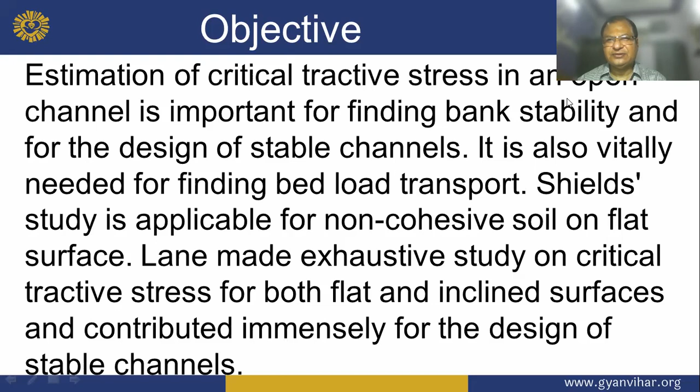However, all these studies are applicable for straight channels only. Starting from fundamentals, the author has derived an equation for critical tractive stress for both straight and curved channels. It has been shown that the shear stress induced by secondary current in a typical curved channel, that is in a meandering bend, significantly reduces the critical tractive stress on the outer side of the bend.

If the stress due to secondary current is very high due to strong flow curvature, the critical tractive stress may vanish, and the outer bed and bank may cave in even with insignificant forward drag.

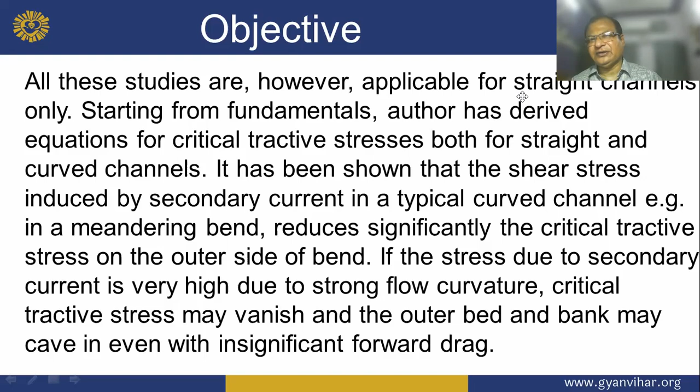Next, on the regime: flow regimes are associated with different boundary conditions. Three flow regimes are usually identified: steady state, pseudo-steady state and transient state. The flow regime depends on the boundary condition, and it can be identified by the rate of change of pressure with time.

The steady state flow regime corresponds to a system in which the mass flow rate is constant everywhere and pressure is constant with respect to time. An example of a system that exhibits steady state flow is a reservoir connected to an infinite-acting aquifer. The corresponding boundary condition is referred to as a constant pressure boundary.

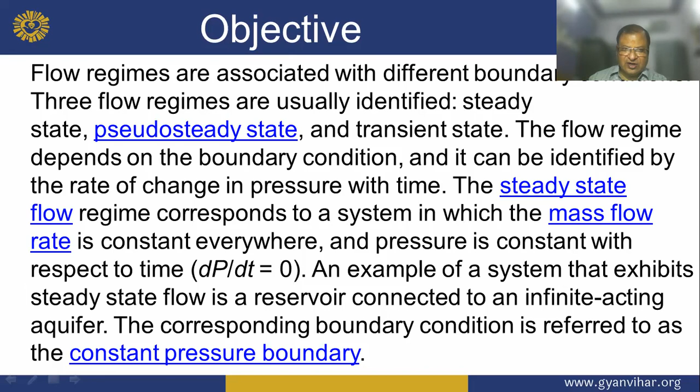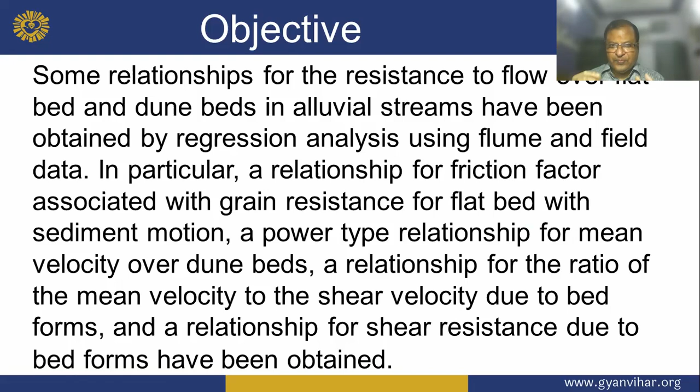Next, some relationships for the resistance to flow over flat bed and dune bed in alluvial streams have been obtained by regression analysis using flume and field data. In particular, a relationship for friction factor associated with grain resistance for flat bed with sediment motion, a power type of relationship for mean velocity over dune bed, a relationship for the ratio of the mean velocity to the shear velocity due to bed form, and a relationship for shear resistance due to bed form have been obtained.

So now we will start rigid and mobile channels. I have just explained in which condition the rigid converts to mobile. In which condition? So we will discuss the condition today. My dear boy, suppose you have made an artificial way nowadays, and the river bank has a very high width. Somebody has taken measurements: over 15-20 years, the river flow area is this.

So they have made a channel. My dear boy, they have made a channel. They have given a proper way to flow in the river, and this entire area they have converted into an irrigation field.

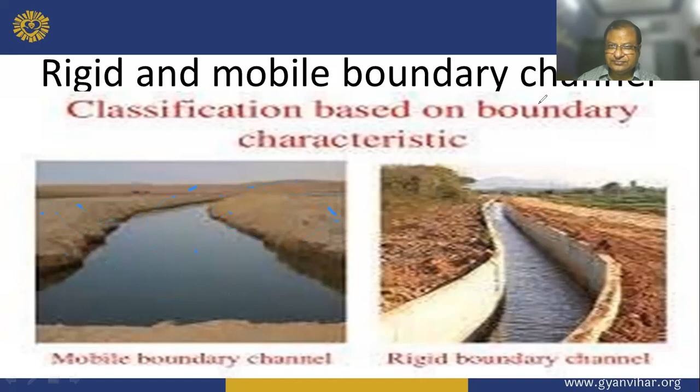Now, the rigid boundary channel we will discuss again. A channel whose bed and banks are made of non-erodible material and can resist erosion satisfactorily. What is erodible material? For example, soil. Resistance to water depends only on the nature of the boundary surface, and it can be determined. Dimensions can be calculated by using uniform flow equations, that is, Manning's and Chezy's equations.

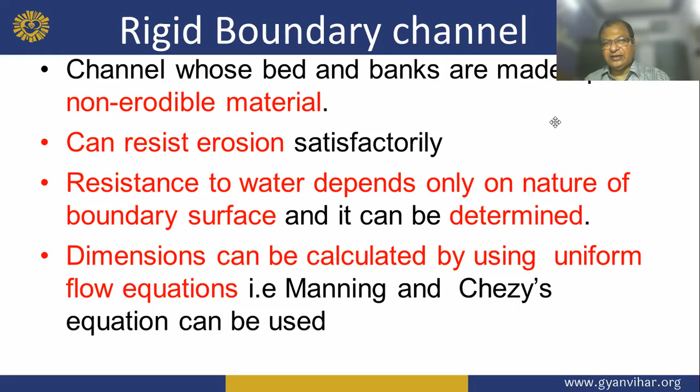Resistance to water depends only on the nature of the boundary surface, and it can be determined. Dimensions can be calculated by using uniform flow equations, that is, Manning's and Chezy's equations can be used.

Now, a mobile boundary is made up of loose soil which can be easily eroded and transported by flowing water. As we just discussed, after high-intensity rain the channel of the nala and the channel of the river had expanded, and could not resist erosion of the bed. So the boundary is made up of loose soil which can be easily eroded and transported by flowing water. That is, a river or unlined alluvial channel.

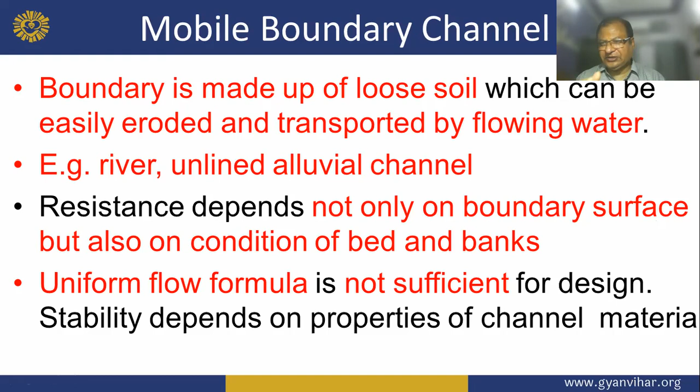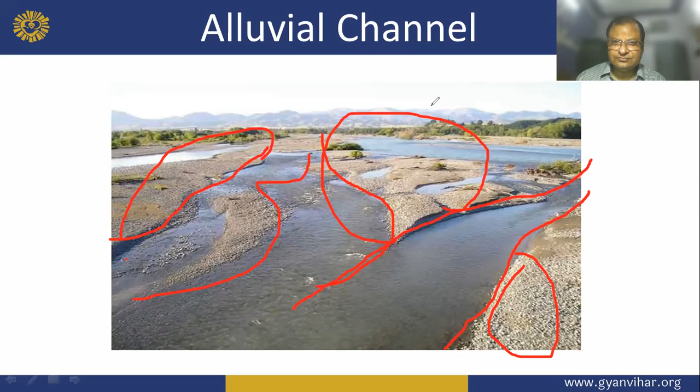Now it transports water as well as sediment, and the sediment and channel boundary material have same properties. It is stable if sediment inflow is equal to sediment outflow and the channel bed remains constant. So shape, longitudinal slope and cross-sectional dimensions depend on the discharge, size of sediment and sediment load.

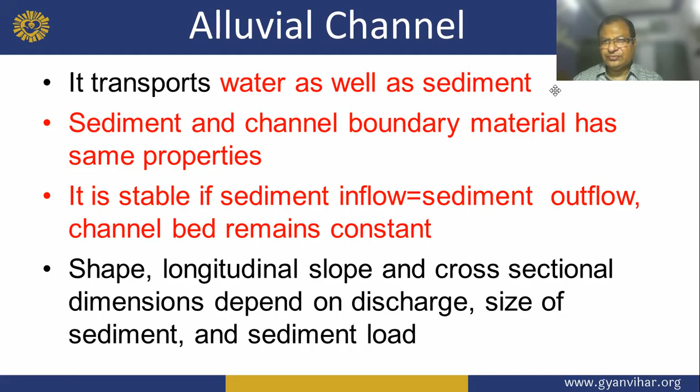So, shear stress distribution on the boundary. Here is a very good diagram of the shear stress distribution, and at this point it has shown the flow of water. The alluvial soil has changed its shape because alluvium has no strength. It is a very poor and loose soil. But one thing, it is very fertile soil. No project can guarantee 100% when constructed in alluvial soil.

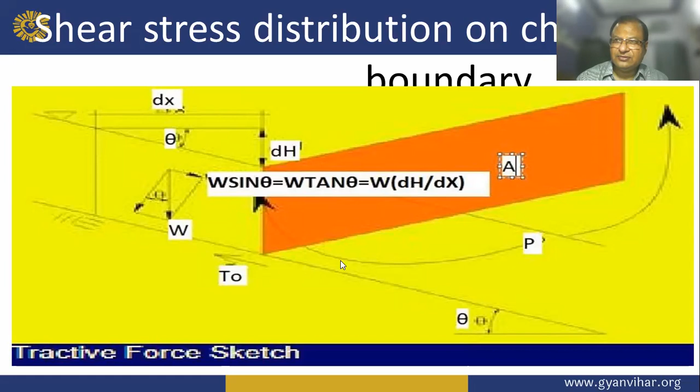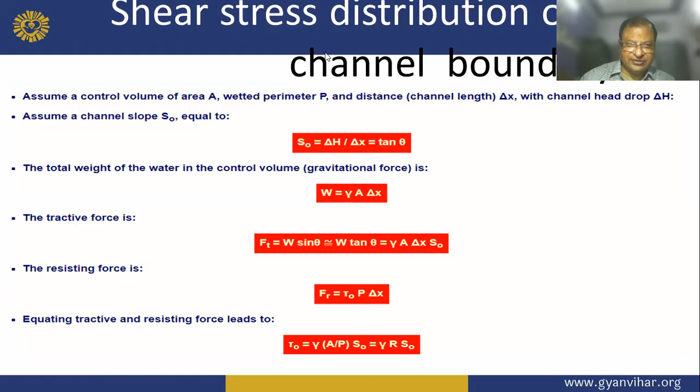Now, shear stress distribution on channel boundary. And this is some formula.

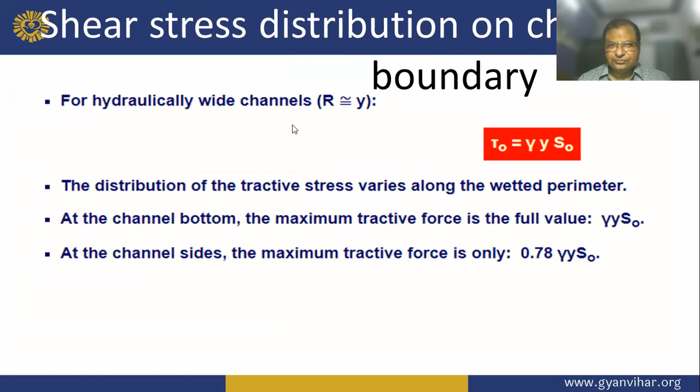Suppose, my dear boy, this is the flow. This is the flow. And this is the alluvial step. So this is the shear. Here, the change is here and the change here. In the three stages, shear force will be applicable on this, and what is the shape change? See that. So this will be made like this, and suddenly in a few hours it will all be a mobile channel; all the mobile alluvium will run with the water.

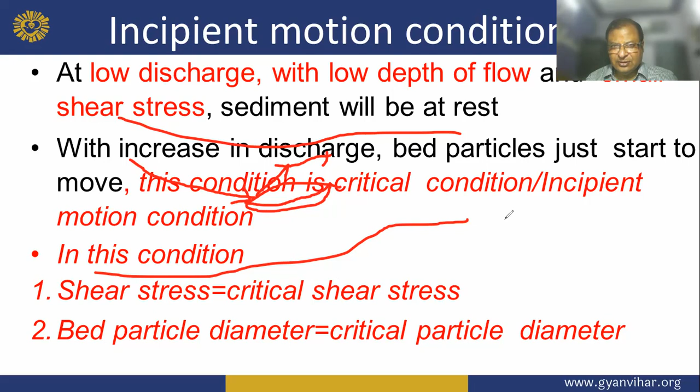When we get high flow, now shear stress is equal to critical shear stress, and bed particle diameter is equal to critical particle diameter. Shear stress is critical. Why critical? Because there is no way to save the alluvium. And bed particle diameter is equal to critical particle diameter. Incipient motion condition video.

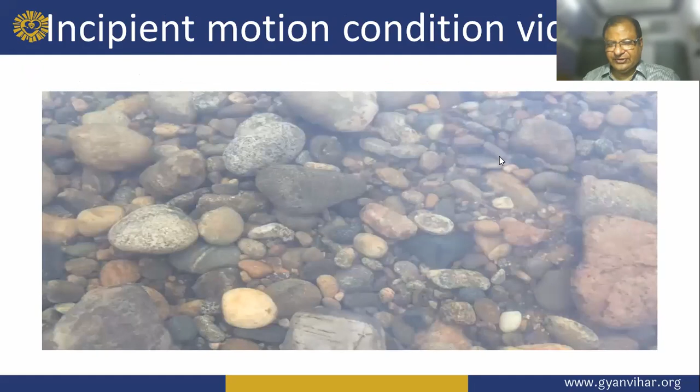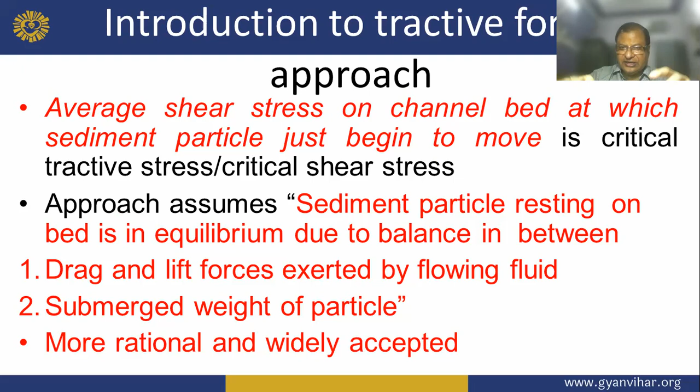Now, introduction to the tractive force approach. Average shear stress on the channel bed at which sediment particles just begin to move is the critical tractive stress or critical shear stress. The approach assumes a sediment particle resting on the bed in equilibrium due to balance between drag and lift forces exerted by the flowing fluid, and the submerged weight of the particle, and is a more rational and widely accepted approach.

Now, introduction to the Shields diagram. According to Shields, the tractive force exerted by the flowing water on the sediment to cause motion is equal to boundary shear τ0. So, tractive force, or resistance to motion of a single sediment. Dimensionless ratio, using this formula, significant parameters and bed movement, grain diameter. S, γs and γw, specific weight of the sediment and water.

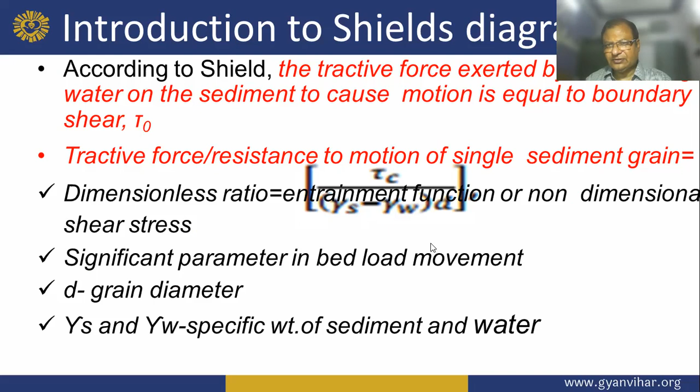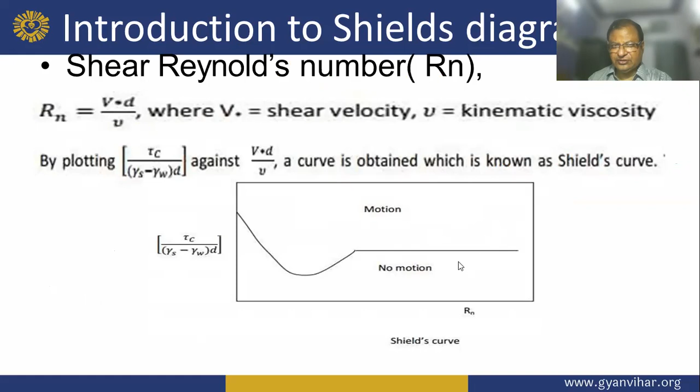So now, shear Reynolds number. So Rn is equal to V star D upon v, where V star is the shear velocity and small v is the kinematic viscosity. Now we will discuss shear stress: the formation of the river bed based on the shear stress. How is a river bed formed? Just as you have seen.

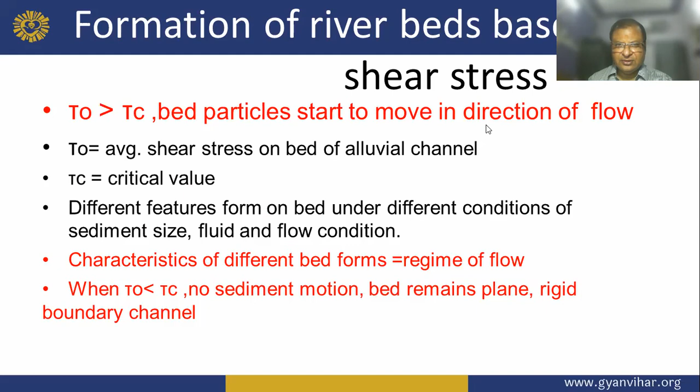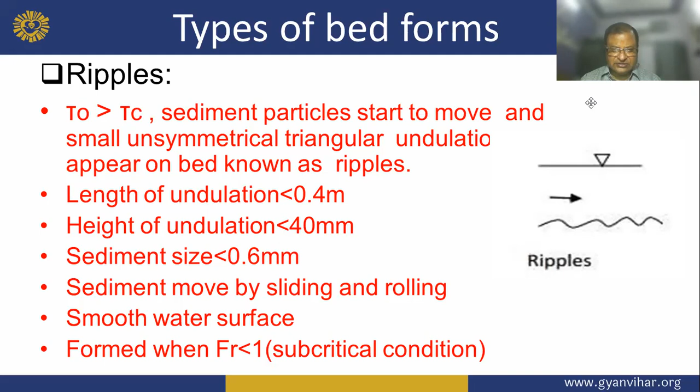Now ripples. τ0 greater than τc, so sediment particles start to move and small unsymmetrical triangular undulations appear on the bed, known as ripples. Length of undulation is less than 0.4 meter. Height of undulation is less than 40 mm. Sediment size is less than 0.6 mm. Sediment moves by sliding and rolling, the water surface is smooth, and they form under subcritical conditions.

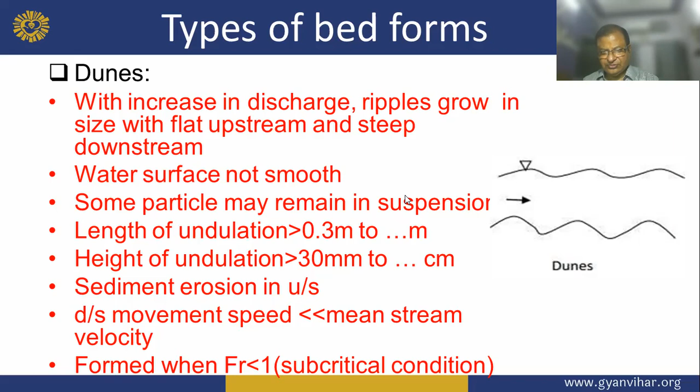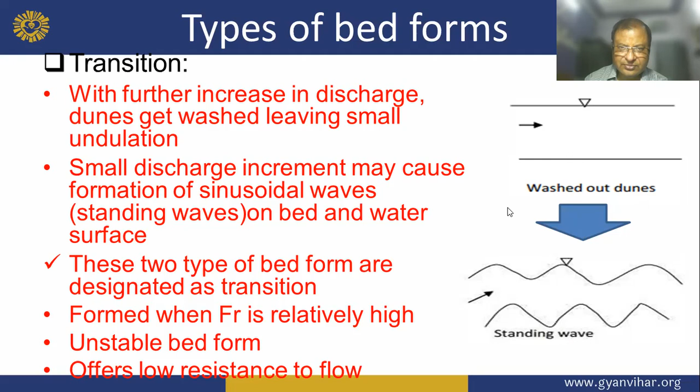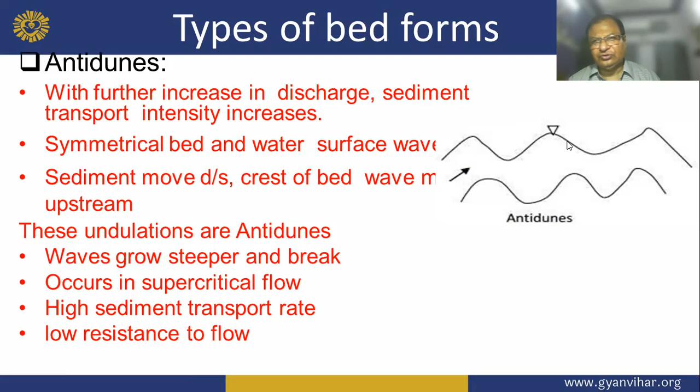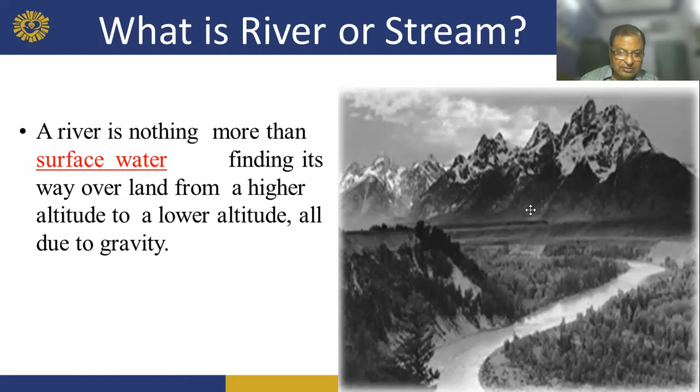Now we'll discuss what a river or stream is. Dear boy, what is a stream? A river is nothing more than surface water finding its way over land from a higher altitude to a lower altitude, all due to gravity. How do they begin? Rivers or streams begin their lives as smaller creeks, often called the headwaters, and these small tributaries run downhill until they merge into a bigger tributary, which continues merging to form a larger river. So here we will understand what a tributary is.

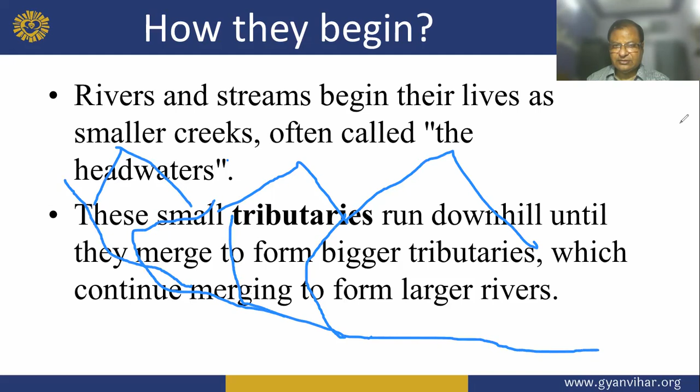If there is a hillock, and if any barrier is not available to store the water, all water will flow around the mountain. It will come into the basin and all small rivers will be joined and come like this. These small tributaries run downhill until they merge into a bigger tributary, which continues merging to form a larger river.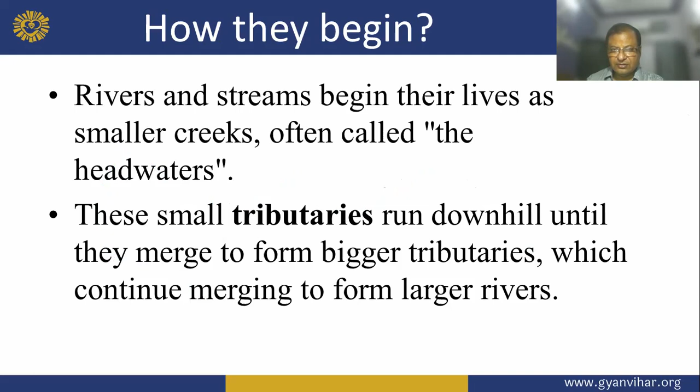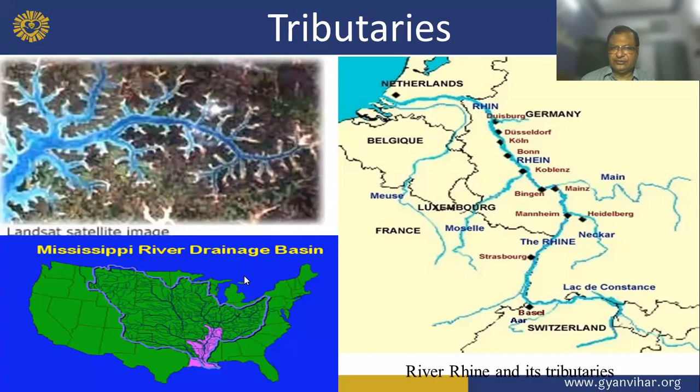Now work of streams. The work of streams includes erosion, transportation, and deposition.

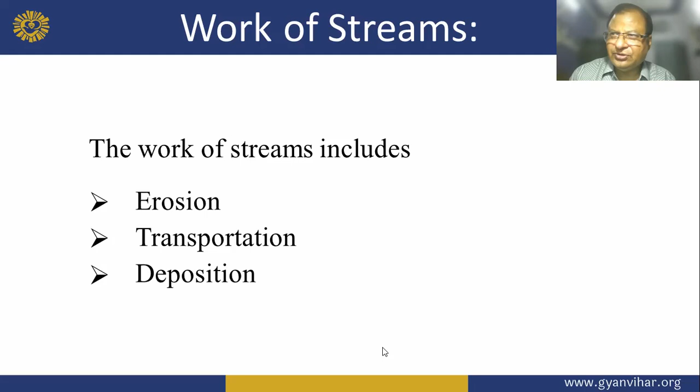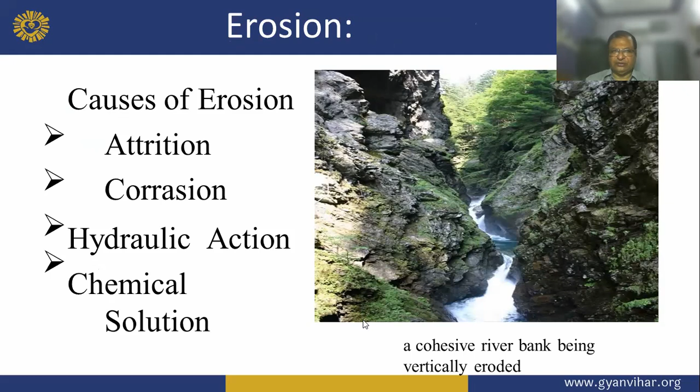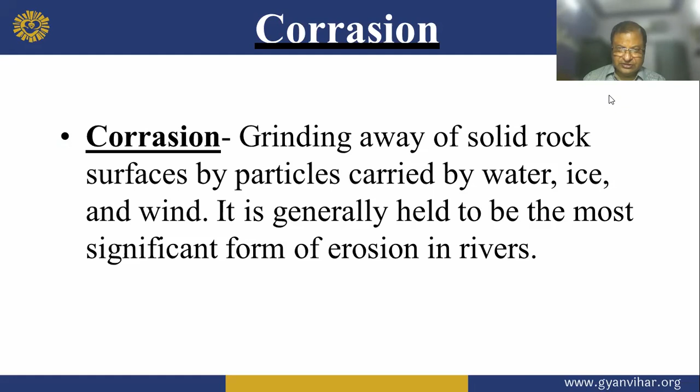Now erosion, the causes of erosion: attrition, corrasion, hydraulic action, and chemical solution. Corrasion is the grinding away of solid rock surface by particles carried by water, ice, and wind, and it is generally held to be the most significant form of erosion in a river.

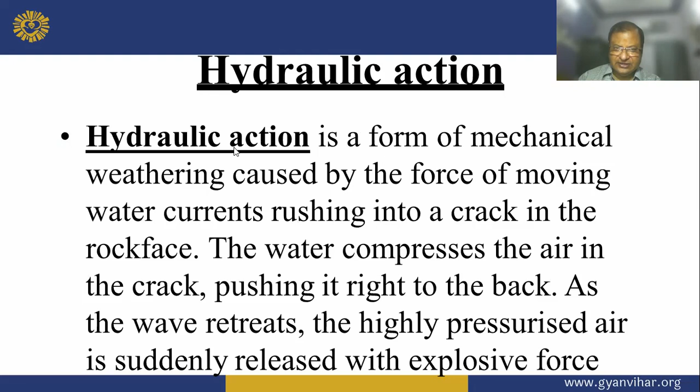Hydraulic action is a form of mechanical weathering caused by the force of moving water, current rushing into a crack in the rock face, and the water compresses the air in the crack, pushing it right to the back. As the wave retreats, the highly pressured air is suddenly released with explosive force.

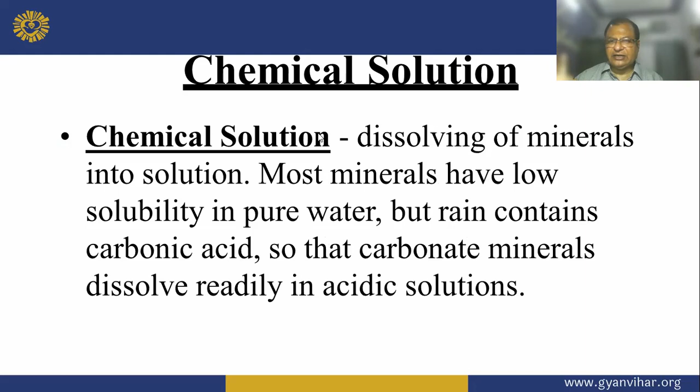Now chemical solution: the dissolving of minerals into solution. Most minerals have low solubility in pure water, but rain contains carbonic acid, so carbonate minerals dissolve readily in the acidic solution.

Now, ways of transportation. Streams transport the load and sediment in three ways: in solution, in suspension, and by sliding or rolling along the bottom bed load.

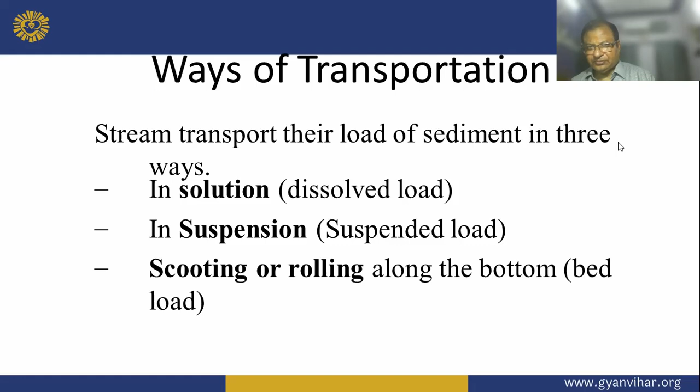How will it be rolled? Suppose it is like a roll. It is developed like this.

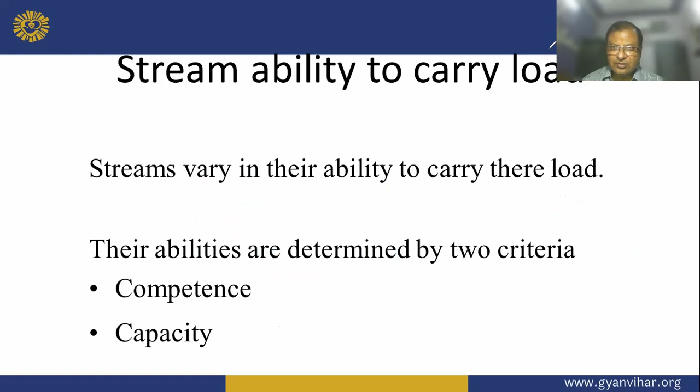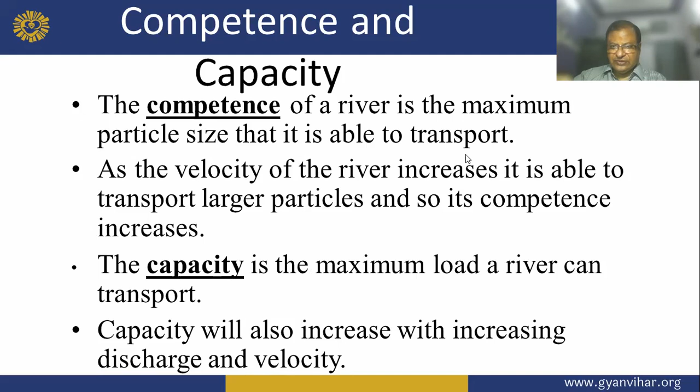Now, competence and capacity. The competence of a river is the maximum particle size it is able to transport, and as the velocity of the river increases, it is able to transport larger particles, so its competence increases. The capacity is the maximum load a river can transport, and capacity will also increase with increasing discharge and velocity.

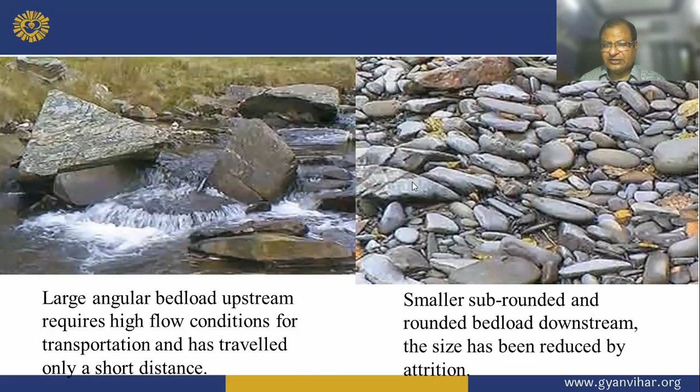Now, these are small chips, larger angular bed load upstream, requiring high flow conditions for transportation and having traveled only a short distance, and smaller, sub-rounded bed load downstream, where size has been reduced by attrition.